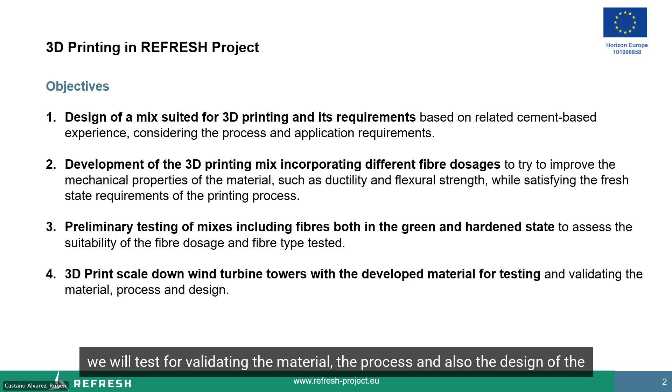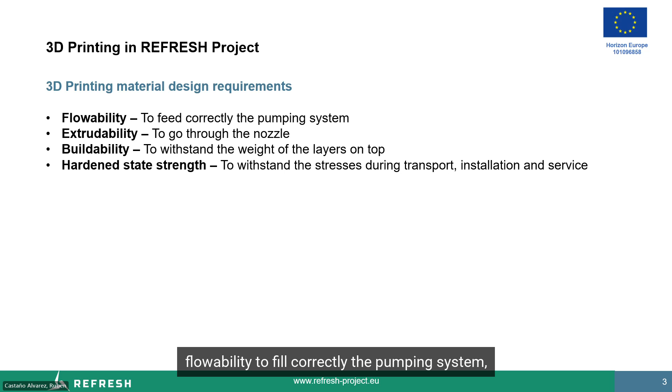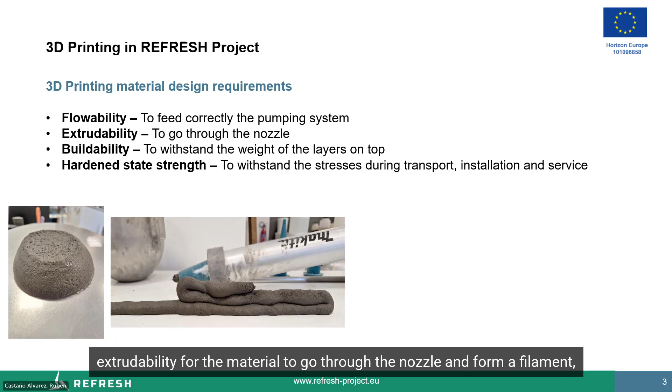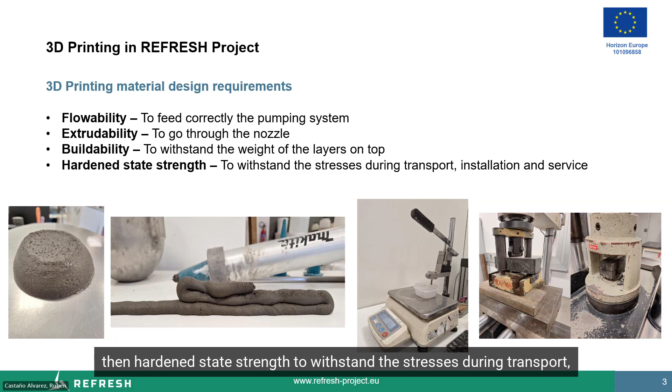So the materials for 3D printing have four main requirements: flowability, to feed correctly the pumping system; extrudability, for the material to go through the nozzle and form a filament; buildability, the property to withstand the weight of the layers on top; and then hardened state strength to withstand the stresses during transport, installation, and service.

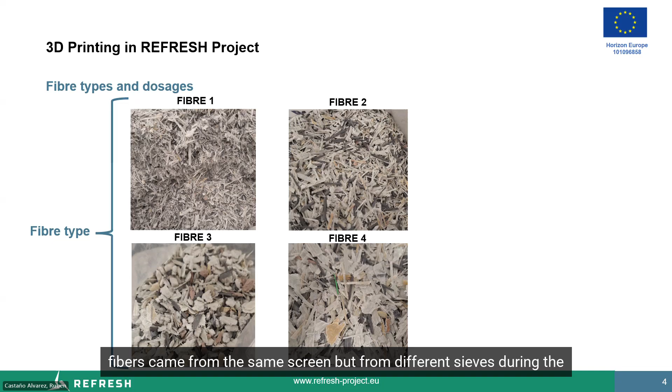Here we have four of the mechanical recycled fibers provided by MTD. These fibers came from the same stream, but from different sieves during the recycling process and the shredding process. We have been testing different dosages, as we can see in the right side of the slide, with dosages as 2, 5, and 10%, evaluating the properties both in the fresh and hardened state, as I mentioned before.

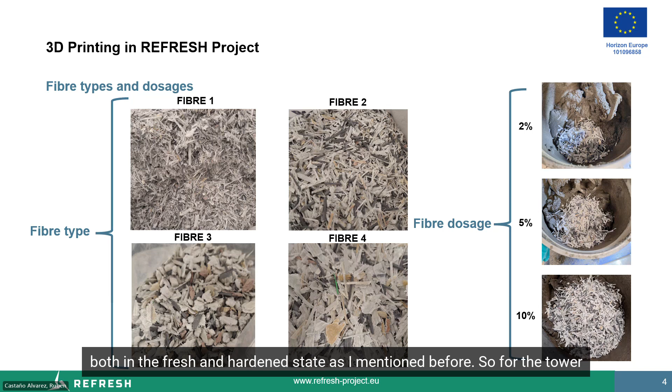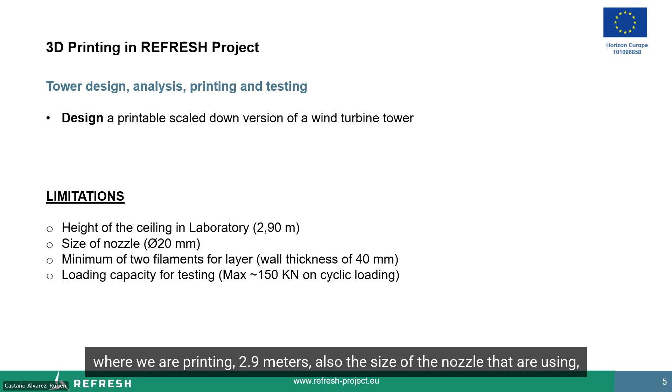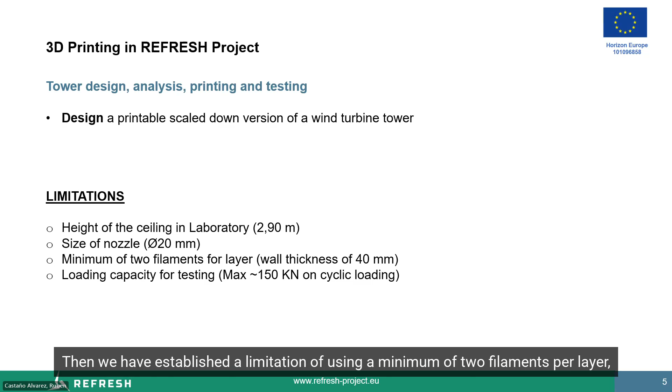So for the tower design, analysis, printing, and testing, first we have to design a printable scaled-down version of the wind turbine tower. We have some limitations into the design, so we have to take into account the height of the ceiling in the laboratory where we are printing, 2.9 meters. Also, the size of the nozzle that we are using. It's a round nozzle with 20 millimeters in diameter. Then we have established a limitation of using a minimum of 2 filaments per layer, one next to each other. So this will give us a wall thickness of about 40 millimeters.

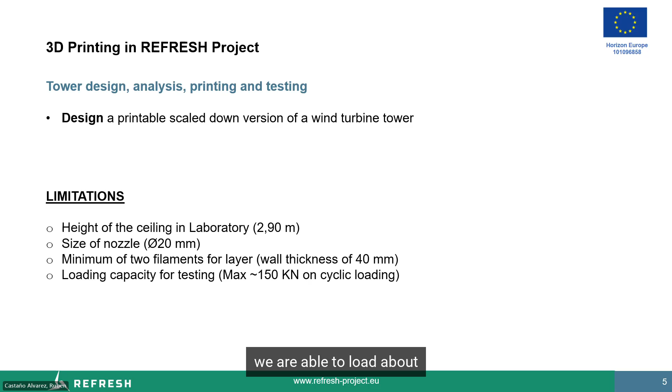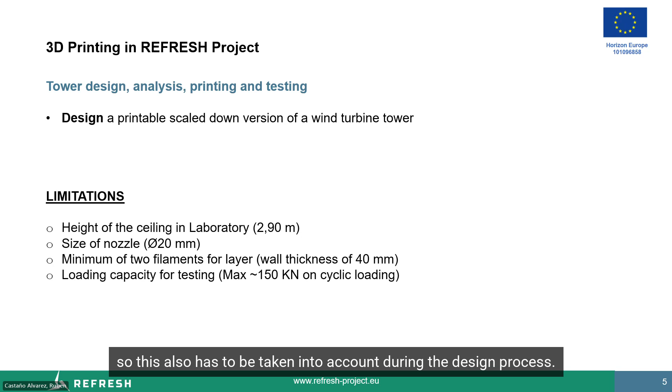And then for the testing part, we are able to load about 150 kilonewtons on cyclic loads. So this also has to be taken into account during the design process. First, the design on the left was the first design, a tower that is 2.2 meters high and has a base diameter of 49 centimeters. And the second design was a tower that is much slimmer, and it is 2.7 meters high and has a base diameter of 31 centimeters.

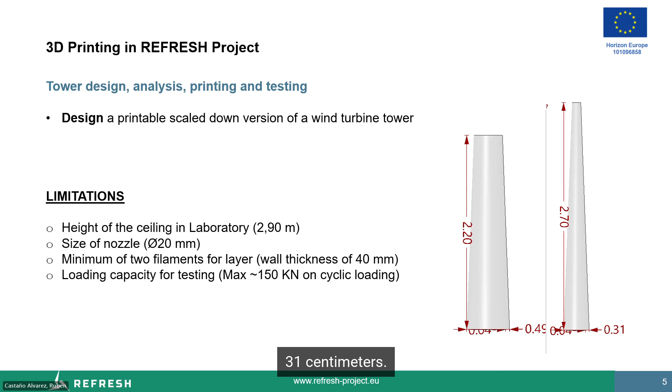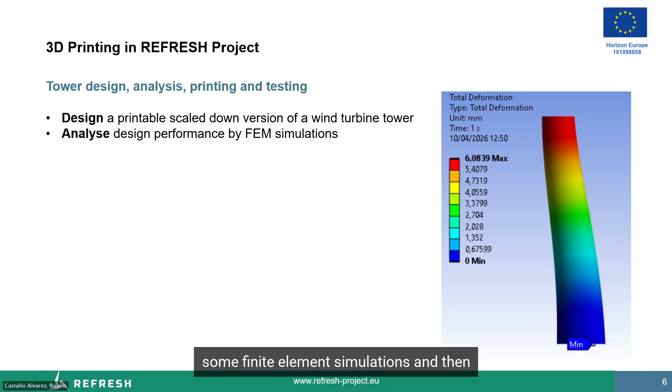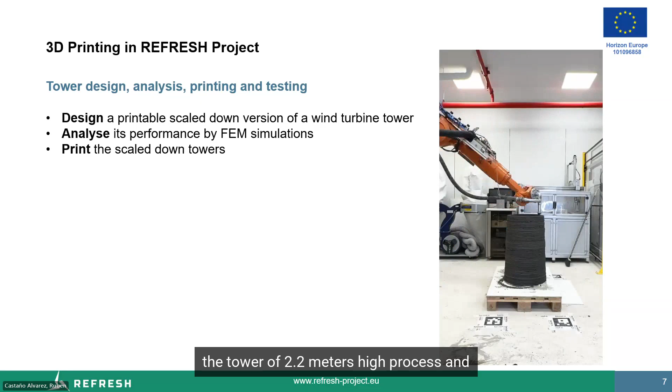Once designed the towers, we have to analyze the performance by running some finite element simulations. And then we start with the printing. Here is a little video of the tower of 2.2 meters high process. And we are going to see some problems during the printing right here, that we have to pause the pump and continue after.

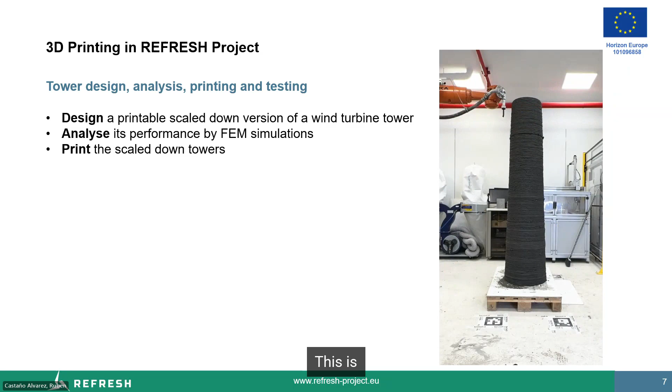This is the final tower once printed, and me for scale to grasp the size of the tower. And then we will have to test the towers to validate all the material, the design, and also the process. And that will be the end of the project for our part.

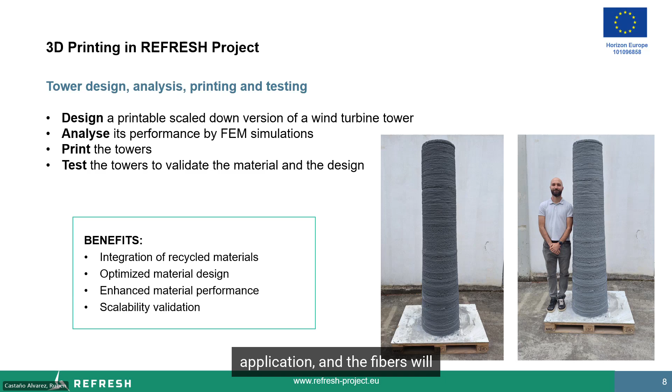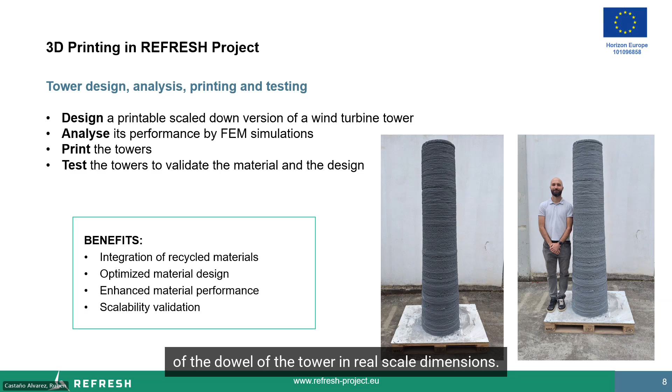The main benefits of this work will be that we are integrating the recycled fibers into the towers. We will have designed a material that is optimized for this application, with and without fibers. The fibers will be enhancing the performance of the base material, acting as a reinforcement. And then we have been validating the scalability of this process, because if we can print a 2.7 meters high tower, we will be able to print at least a section of the tower in real scale dimensions. So we will validate that also.